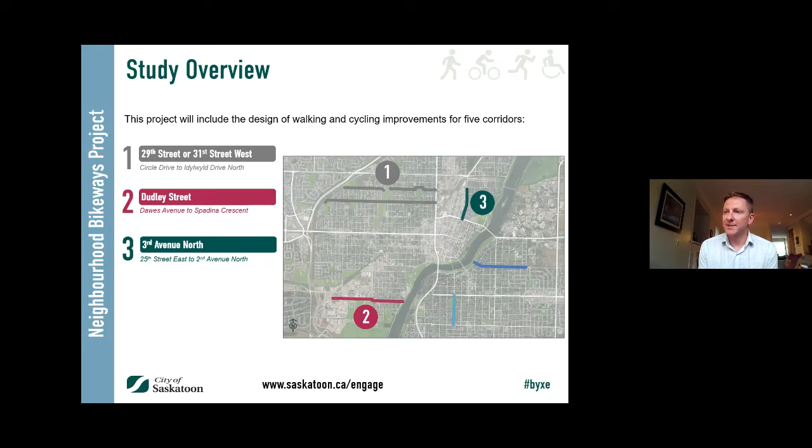5 corridors have been identified in the active transportation plan that have been included in this Neighbourhood Bikeways project. These include 29th Street or 31st Street West from Circle Drive to Idylwyld Drive, Dudley Street from Dawes Avenue to Spadina Crescent, 3rd Avenue North from 25th Street East to 2nd Avenue North, 14th Street East from Saskatchewan Crescent to Cumberland Avenue, which we'll be talking about this evening, and Victoria Avenue from 8th Street to Taylor Street East, which is being designed by city staff.

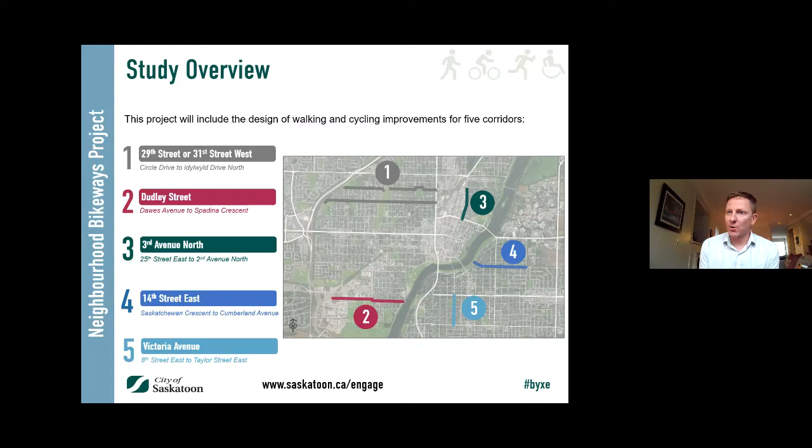So as I mentioned, this is the 3rd event so far as part of this virtual public open house series. We've had events already on the 31st Street corridor and the Dudley Street corridor. So in terms of the study process we're working through, this study is being completed through 5 phases of work. The first phase, early in 2020, consisted of a review of existing conditions. We also conducted public engagement to hear feedback from community members on concerns and considerations. And through that input, over the course of the spring and summer, we have prepared and completed conceptual designs for each of the Neighbourhood Bikeways corridors. So the purpose of this virtual open house is to present the recommended concept for the 14th Street East corridor and to answer any questions you might have.

So before we get into the details of the specific design treatments for this corridor, I'll provide a bit of an overview of all ages and abilities cycling facilities. So all ages and abilities cycling or active transportation facilities are safe and comfortable for people walking and cycling regardless of their age and ability. There are 3 different types of all ages and abilities or AAA cycling facilities that were considered for each of the study corridors. We have protected bike lanes, multi-use pathways, and neighborhood bikeways. I'll explain the features of the different facilities in the next few slides.

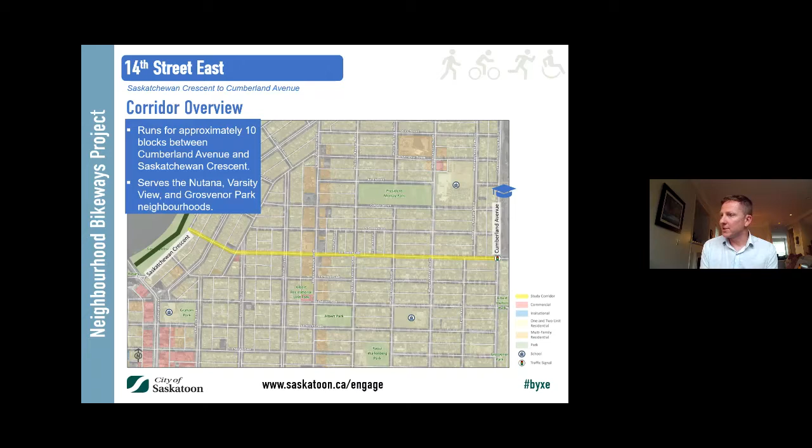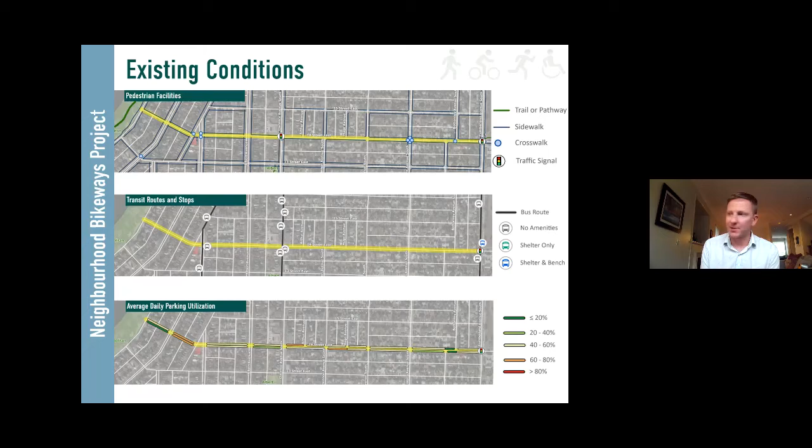The map in the middle shows that currently there's no transit routes along the 14th Street East, but there are transit routes that intersect the corridor at Lansdowne Avenue, Clarence Avenue, and Cumberland Avenue. And finally, the map on the bottom shows on-street parking utilization along the corridor, which shows that parking usage is moderate throughout most of the corridor, with an average parking utilization of around 50% for most blocks along the corridor.

So through the first round of public engagement, we asked community members what they would like to see improved along the corridor. Some of the most common responses included education for people driving on how the bike signal works, specifically at Clarence Avenue, improved road surface condition and snow clearing, the desire for a future cycling connection on Wiggins Avenue, improved connections to the University of Saskatchewan and across Cumberland Avenue, and the opportunity for reduced speeds along the corridor. These opportunities and challenges were identified through that first round of public engagement, and they have directly influenced the recommended design presented in the following slides.

So let's walk through some of the key elements of the design. And as I mentioned, 14th Street is designed as a shared neighborhood bikeway. So again, a neighborhood bikeway being a facility with low traffic volumes and low speeds, where cyclists share the road with motor vehicles. This neighborhood bikeway would then transition to the existing multi-use pathway east of Cumberland Avenue on 14th Street East. And with a neighborhood bikeway design, as I mentioned, on-street parking would be maintained on both sides of the street throughout the majority of the corridor, and traffic flow would remain as it is today with two-way vehicle traffic along the street. So let's start with a few more details working in the west of the corridor, and we'll work our way east.

So if we start at Saskatchewan Crescent, looking at the design treatments along the corridor to ensure the street is comfortable and safe for people walking and biking. At Saskatchewan Crescent, we've identified a new painted crosswalk and a new all-way stop control that will improve intersection safety and connections to the Meewasin Trail. We would have parking maintained on both sides of the street for the corridor. And at University Drive, stop signs would be reversed to allow people biking on 14th Street to travel at continuous free flow. Currently, the stop signs are oriented east-west, but we would reverse those to north-south.

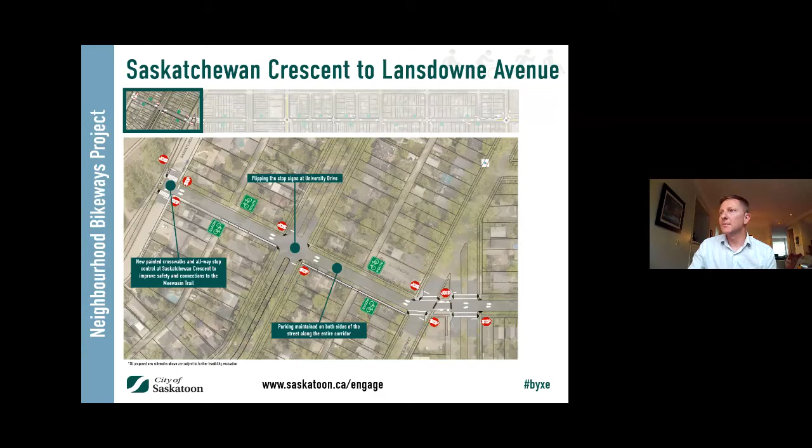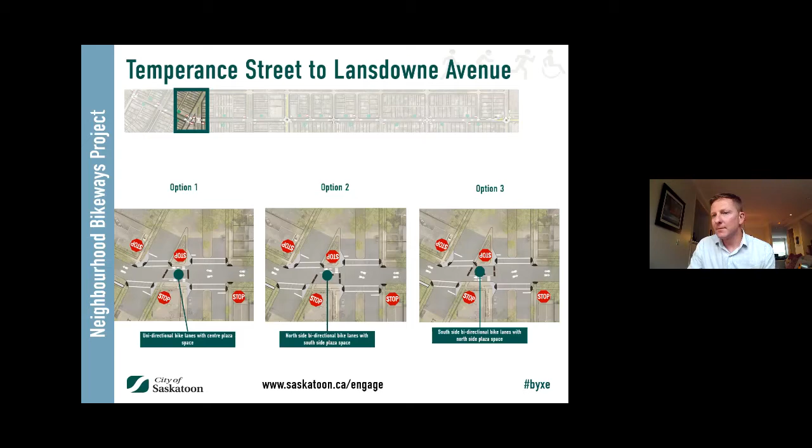So as we continue moving east from Lansdowne Avenue to Clarence Avenue, again, parking would be maintained throughout this section. Some of the other changes include yield signs on Albert Avenue, which would be changed to stop signs, and a new sidewalk is proposed on the south side of 14th Street, east of Albert Avenue, to improve pedestrian safety and connectivity, pending further evaluation of feasibility.

Continuing onwards from Clarence Avenue to Munroe Avenue, again, as with other segments of the corridor, parking is maintained. A new painted north-south crosswalk would be provided at Clarence Avenue to improve pedestrian safety at the existing bicycle signal. We would propose new curb extensions at McKinnon Avenue to improve pedestrian safety and reduce traffic speeds. And we're proposing a new sidewalk on the north side of 14th Street East to fill sidewalk gaps and improve pedestrian safety, pending further evaluation of feasibility.

Continuing onwards from Munroe Avenue to Ewart Avenue, new curb extensions are proposed at Wiggins Avenue to improve pedestrian safety and reduce traffic speeds. Parking would be maintained along the corridor, and yield signs would be changed to stop signs.

And then finally, the last segment of the corridor takes us to Cumberland Avenue, and this is where there's a transition to the existing multi-use pathway on the north side of 14th Street East, east of Cumberland Avenue. And so we've developed two options on how we might approach that transition. For option one, this would involve adding a bidirectional raised cycle track on the north side of the street to improve the safety and connectivity to the multi-use pathway east of Cumberland Avenue. This option would maintain parking on the south side of the street, but would remove parking on the north side of the street directly adjacent to the raised cycle track.

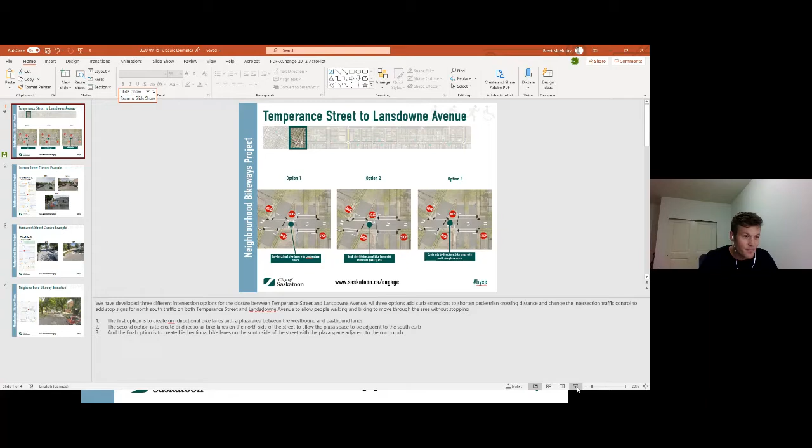Hey, Brian, I'm going to jump in here now just to make sure, while all of the attendees are still here and asking these great questions, which we really appreciate, that we run through the three options that we have for the closure at Temperance, as well as the two different options at Cumberland. So I'm going to pull up a different presentation quickly and find my mouse, to get your input on these three different options. So as Brian had mentioned during the presentation, these three options are really about the configuration of what the bike facilities would look like through this closure, with option one being two unidirectional bike lanes, option two a bidirectional bike lane on the north side, and option three bidirectional on the south side.

So I think that our intent and hope was that we could put each of those three into the Q&A. So Danny, maybe you can add those three as three separate questions or announcements, and attendees can vote on the one that you think is the best using the thumbs up icon. So if you hover your mouse over the thumbs up, you can select the one that you think would be the best fit for this location.

And maybe while we're doing that, I will show some examples of what temporary closures or interim closures like this have looked like in other places. So we have some examples from Vancouver. I just think it's important to understand the vision and the context, and understand that these spaces, even though currently maybe they don't look like much, with community involvement and building some support amongst your neighborhood and your communities, you can see how a space transforms from being something that is really intended for vehicles to something that is a little bit more multimodal and creates space for everyone.

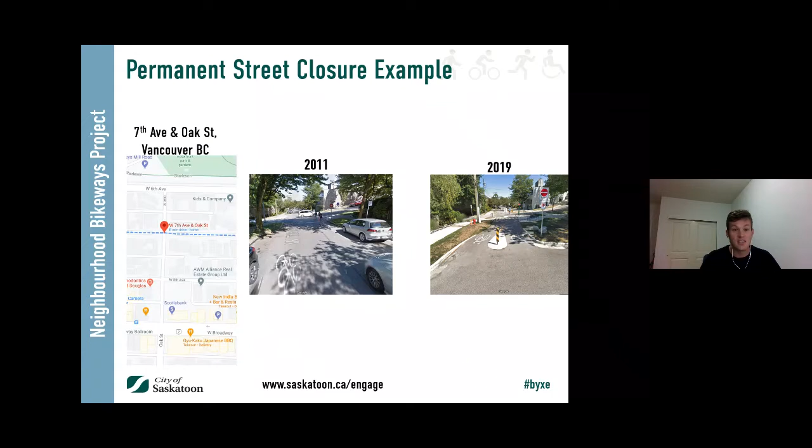So just a different option and sort of a more expensive treatment, but if there is significant reconstruction required in the area anyways, it's potentially something that could be looked at into the future. Our configurations that we're showing are quite a bit more straightforward than that, using some planters and potentially some street furniture, but just looking at what the vision for the future could be.

So I see now that there's been a few thumbs up in the question and answer, and so maybe I'll pass it back over to Brian here, and then we can go to the Cumberland closure as well. I guess, catching myself here, there's one more slide I can go to, highlighting the transition between a neighborhood bikeway and a bidirectional protected facility like we are considering for the last block on 14th Street at the east end of the corridor near Cumberland.

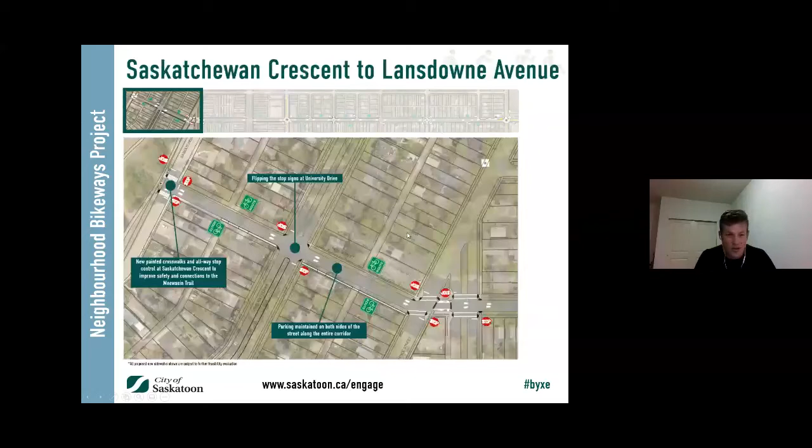And so the idea would be that this is really a bicycle priority street, where people who are driving on it are there to access their homes. There's not any restrictions, but at the same time, the intent is that they are sort of guests on a street that is really intended to be used for slow and comfortable mobility by all. And maybe I'll scroll back up to an example photo very early in the presentation that showed, there we go, what a neighborhood bikeway may look like.

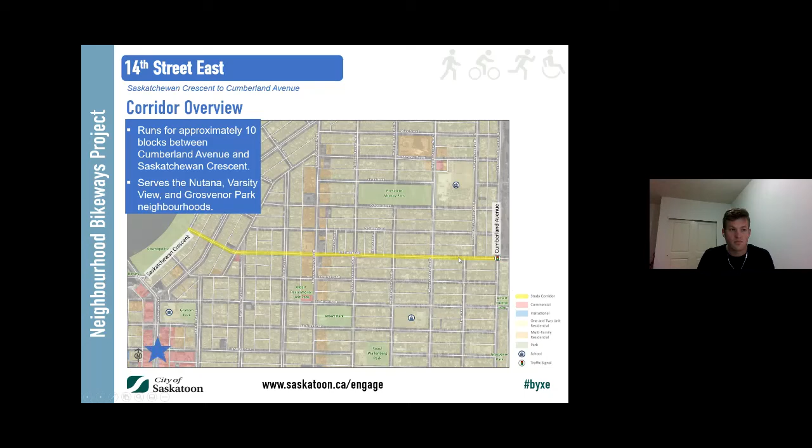Brent, I'm going to revisit a question, as one of the participants felt it wasn't responded to appropriately. It's back to the Cumberland intersection. The comment is suggesting that if the bike path was merged onto the 14th Street roadway, it would be a more workable intersection, suggesting that more cyclists turn northward to the U of S than transition west to Cumberland. Just to get some clarity on that.

Okay, so I'm just going to once again scroll through all these slides. Yeah, so I think the comment here is that cyclists who are continuing up to U of S are heading eastbound on 14th Street and want to make that left turn. Sorry, Brent, I think it's westbound heading north, from the multi-use pathway on Cumberland and then north to the university. And is that currently being done on street? Would those cyclists turn northbound on street, or are they traveling on the sidewalk?

So yeah, once again, a challenge. Maybe Natalie, I can share your face with the rest of the participants. Well, I think the comment was related to having the cyclists merge onto the street before they get to the Cumberland intersection so that they can transition northward more comfortably, if I'm interpreting that properly. Okay. So they're saying east of Cumberland, bring the cyclists back onto the street so that they can transition whichever direction.

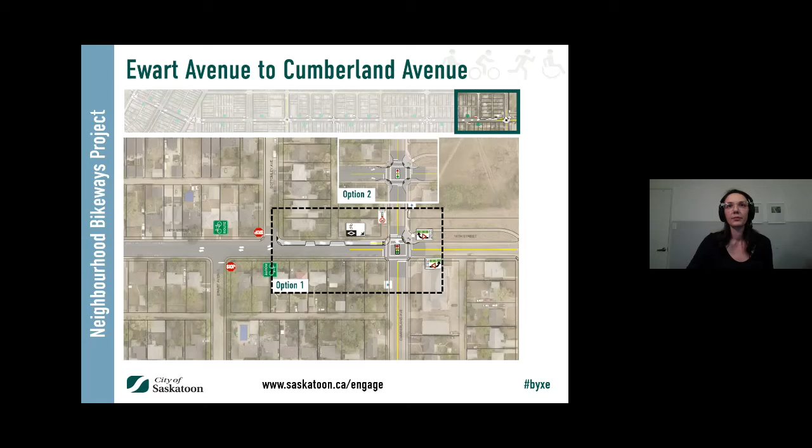Thanks, Danae. There is a question and maybe some misinterpretation of the plans or the drawings, just given that some people are viewing them on mobiles and they're smaller in size. So is the total width of the bike lane and walkway west of Cumberland 4.8 meters or 3 meters? So yeah, it would be 4.8 meters, 3 meters of 4.8 or 4.5, depending on the width of the existing sidewalk. So there's a 3 meter dedicated cycling facility and the existing sidewalk width, which would remain.

And has there been a study of current usage by cyclists of the 14th Street corridor? So I don't believe that was in our traffic counts. I don't know if the city has done bike counts. Yeah, I'm not sure, and maybe that's something to flag, and especially if there are going to be improvements made to this corridor, that it would be worth monitoring what those cyclist counts are in advance and then afterwards. I'm unsure.

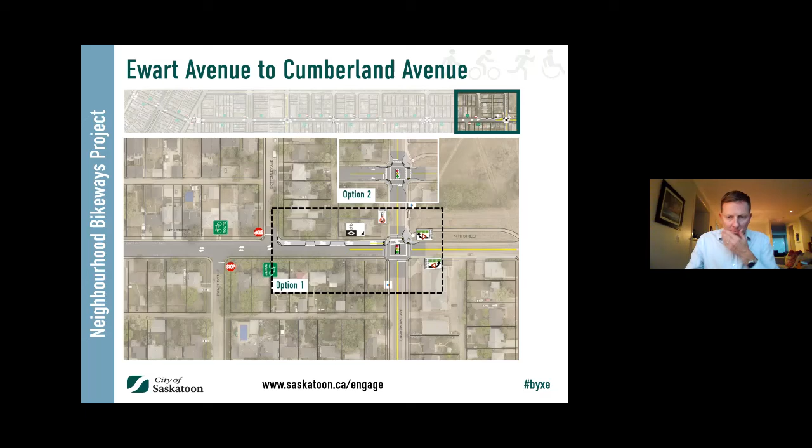Yeah, so I think this goes back to some of the earlier questions about the stop signs for both Sask Crescent and University Drive, and I think it's a fair comment that we've heard, and we need to recognize and balance the needs of people cycling, whether it's north-south to the university or along 14th Street East.

But recognizing we also need to look at the safety considerations as well, and I think that is an important part for Saskatchewan Crescent, that intersection there. Because we have cyclists and vehicles traveling in all directions and trying to access the pathway, adding the pedestrian crosswalks and the stop signs will have a significant safety benefit. And recognize, yes, those stop signs might have some impacts on travel times. It would be quite small, relatively speaking, by adding in that stop sign for people cycling.

As someone who lives on 14th Cumberland intersection, many continue east and use Bottomley or Wiggins to the U of S. So I think that was just related to the other user saying that most cyclists headed northbound at Cumberland. So they're saying they are seeing a lot of cyclists head east as well. Thanks for the comment.

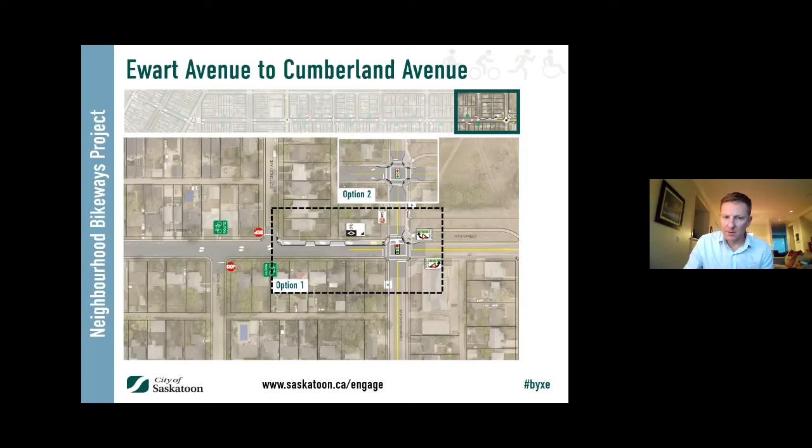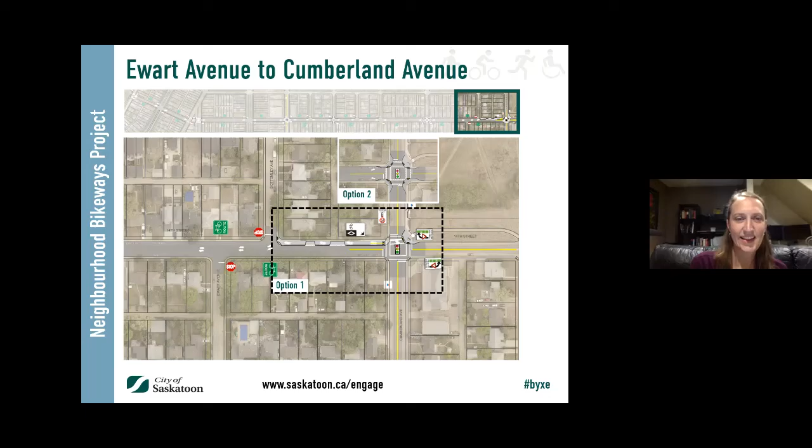Let's just see what I have to do here. Okay, I'm turning on my video. Am I there? Oh, I am there. I look. Okay. Hi, everyone. Sorry, I just sent you guys a long message because I actually am supposed to be somewhere in 3 minutes, but that's okay if I'm late.

Okay, so thank you so much for everyone who's sharing your comments. I also just want to say a very sincere thank you to the consultant on this project, but especially our staff who have been sort of the foundation behind it all the way through. I have, as a result of the promotion of this event tonight, heard from quite a few folks. I will say that probably the most I'm hearing is some concerns about the stop signs on Sask Crescent. How might we help folks better understand those best practices?

Overall, I think that this is how we move forward as a city. If we look at the evidence and data that we have seen from other cities across North America and beyond, it's that connectivity that changes the patterns and allows that ridership to grow. Without that connectivity, we won't see that. I've had some folks say, and this was asked by some of your guests tonight, about different streets that maybe it would be more appropriate to be on because 14th Street already feels pretty comfortable. But the idea is that if you have a roadway that is not as busy as other streets, you have an opportunity to grow that ridership. So those are the pieces that I think the evidence and the data definitely shows.